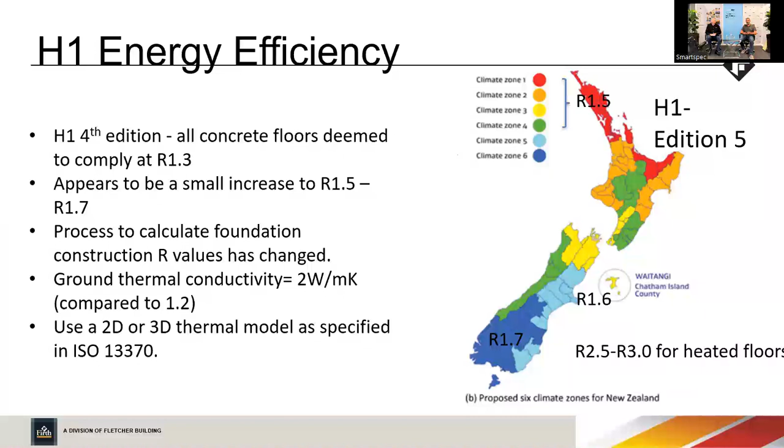The big change is the ground thermal conductivity. In the past, the ground was considered to be 1.2, having a greater insulation value. Now the ground's considered to be 2, meaning a lot more heat is lost from your foundation into the ground. That's the reason for the changes in any R values tabled from any manufacturer or supplier.

Here you can see this is from the Ribraft technical manual, showing how we tabled our R values previous to the 1st of May, and you can see the differences. If you look at area to perimeter ratio 2, for example, it's gone from 1.75 down to 1.13. That's a pretty big difference, not just a 0.2 or 0.4 difference, and this is what's causing the confusion.

So you need to consider that any manufacturer's tabled R values need to be checked to ensure they are correct as of the 1st of May.

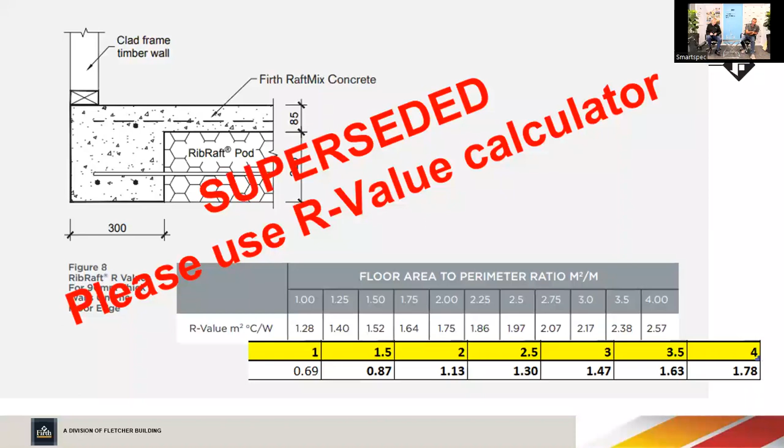In the front of the H1 AS1 document, the wording 'energy efficiency for all housing, and buildings up to 300 square meters' alone is causing some confusion. I did a presentation to the Auckland Council building inspectors recently, and they misunderstood this.

H1 AS1 includes all residential buildings. Some people are still questioning it, feeling that if it's a residential building greater than 300 square meters, it needs to be moved on to H1 AS2, and that's incorrect. The buildings up to 300 square meters clause is for commercial buildings, anything other than residential buildings.

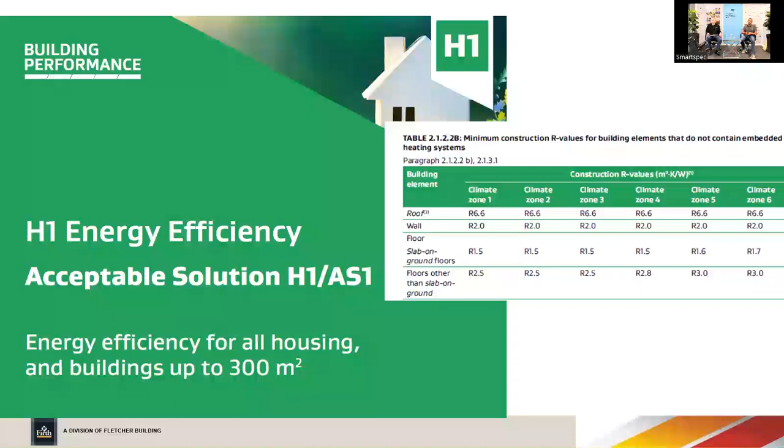I had a look through the questions that were submitted before the webinar, so I'm going to try to cover off some of those as we go. Extensions and alterations to foundations and buildings comes up pretty regularly.

What's important to consider is if it's a new foundation being built, that part needs to comply with the new minimum H1 clause, meaning if it's a small addition with a concrete floor, it needs to be fully insulated to comply with the new minimum requirements. If it's a renovation not affecting the floor, and the floor was built or consented pre-1st of May, then nothing needs to change on the floor.

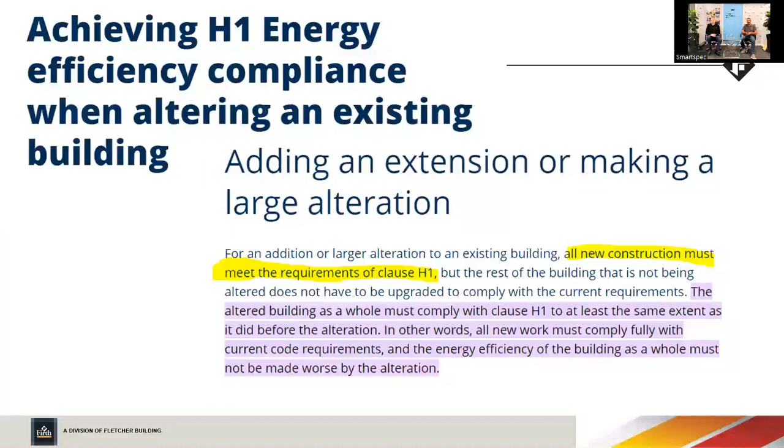It's the same as the rest of the building. If it met the H1 requirements at the time of consent and construction, then it doesn't need to meet the new H1. It's just the new construction that applies.

In the back of H1 AS1, there are tabled R values for area to perimeter ratios. This information can't be 100% relied on, in my opinion. For example, the hot edge for brick veneers, you can see the detail there.

We need that 25 mil concrete to transfer the brick veneer load back into the foundation, so we're not comfortable taking the hot edge directly underneath the brick veneer. If you look at the tables, it states an R1 edge insulation full height, so it's not possible to get it and comply with the B1 code.

This is why every material manufacturer or supplier actually needs to thermal model their own systems, and in my opinion, not rely on the information in H1 AS1.

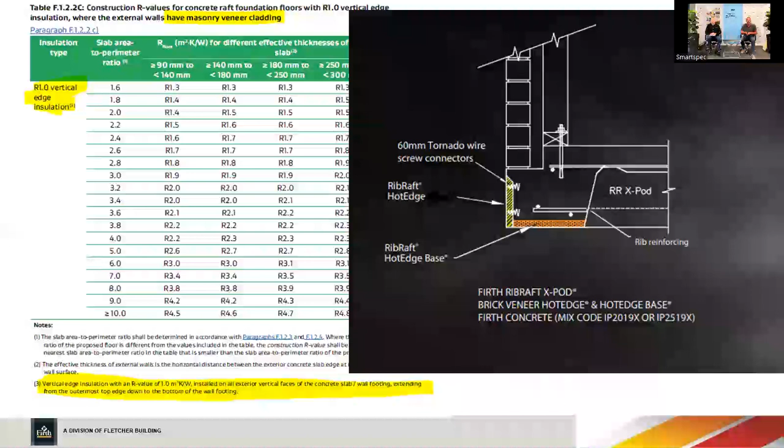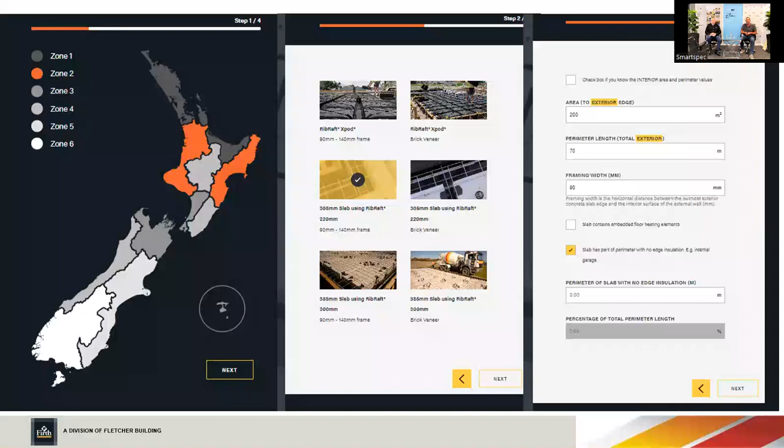So we thermal modeled all of our different systems. At the time, we were looking at different options to try and cover off every solution, for heated floors, non-heated, for X-pod, rib raft with a 220 mil pod and rib raft with a 300 mil pod. We tabled this information into a calculator. It's a very easy step, and I'm sure many of you are aware of it, so I won't go on about that, but it's a super simple tool and easy to use.

One of the questions that comes up is the insulation between conditioned and unconditioned spaces. The best way forward with this is to not insulate that area, to not try and have a thermal break built into the slab. So the solution would be to make a correction, where you just deduct your edge insulation, your length of perimeter with no edge insulation, off your overall result. This is the same as in the BRANZ House Insulation Guide, which has this correction table.

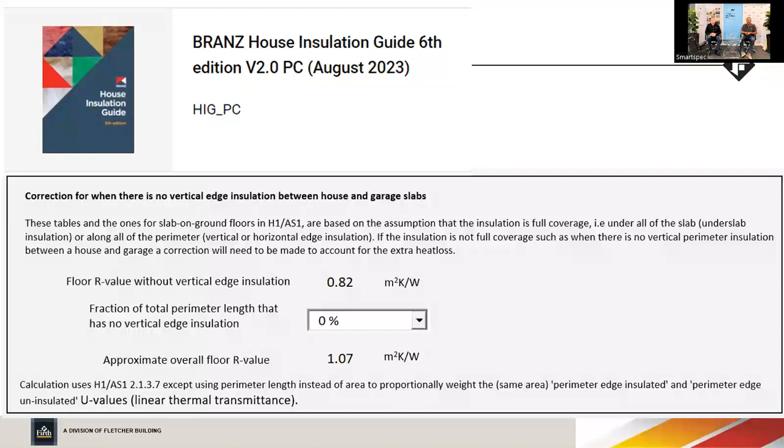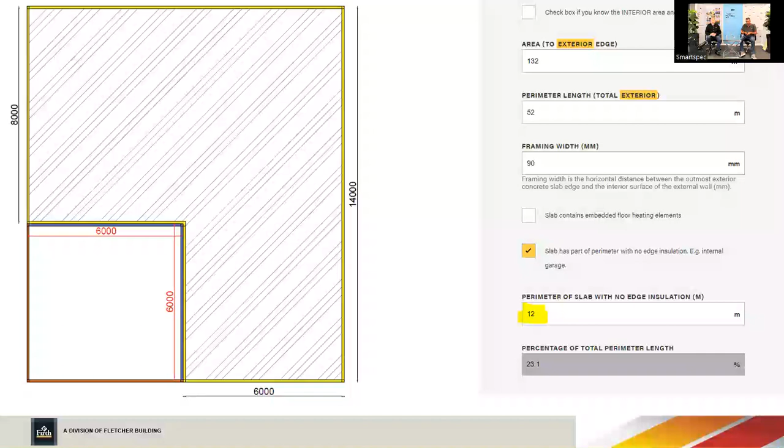So I'll show you how it works on the Firth R-value calculator, because this is coming up quite a lot. There's just your basic slab and garage area without the hatching, for example, so your area excludes the garage area. Your perimeter now becomes the full perimeter, but is an internal 6 meter and 6 meter, the 12 meter section - that's your new perimeter. So you can select the box where it has slab as part of perimeter with no edge insulation and enter your numbers, that's 12 meters, and the calculator does a correction on a percentage basis.

Just as an example, you'll see a detail pop up. This is the same floor slab as an example. Your area to perimeter ratio is 2.5, 23% without edge insulation. So if you use hot edge extra and a hot edge base in this scenario, you get an R value of basically 1.6.

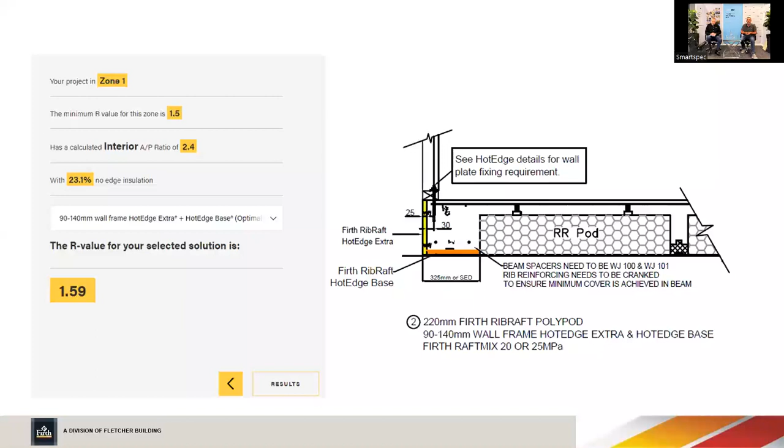Questions I'm being asked - people are not seeing the drop-down box, so purposely I'm showing the slide. At that stage in the calculator, you can drop down the box and see all the other insulation scenarios we assessed. The calculator will always find you an optimal result. You can go below minimum, see what - for example, this optimal was hot edge extra and hot edge base. You can go below and just use the hot edge extra and eliminate the base, or you can eliminate all edge insulation and see what your R value is. So the same example would give you an R value of 1.27 with no insulation. And this is the PDF that you could then submit for building consent if you're wanting to use the calculation method, where you don't meet the minimum and you're using a lower value for calculating.

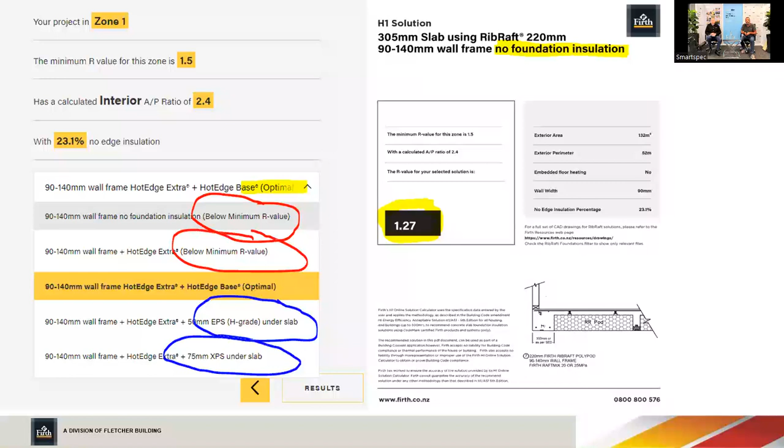This was a project I worked on with a designer. He had these 4 units and he was looking at what he needed to do to get to the new R values. Eliminating the garage space is what is required as it's non-habitable, non-conditioned space. The area to perimeter ratio is 2. Uninsulated standard rib raft system, R value is 1.1.

Now, in my opinion, if you can insulate that garage area, you're going to increase your area to perimeter ratio to 3.2 on the exact same job. That uninsulated R value is 1.5 and complies with the minimums in zones 1 to 4. That would also eliminate the need for insulation of the first story floor, so the underside of that floor in the garage space - possibly a cheaper option. And I know there's some work being done on garage doors, so if we could include that, that would be, in my opinion, a better result on this kind of style build.

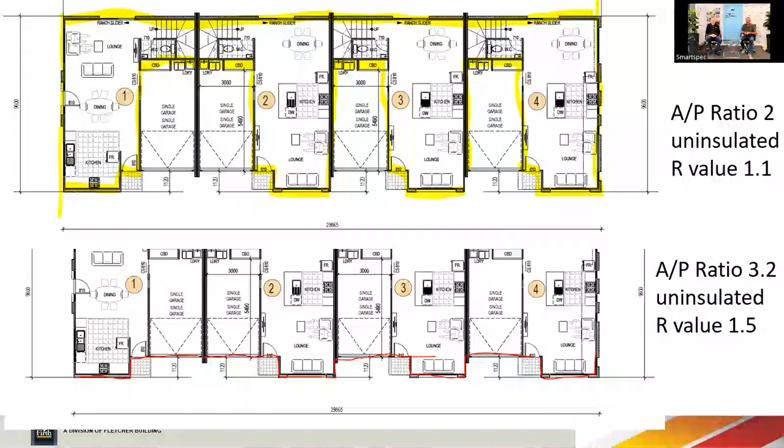The hot edge system has been around for about 7 or 8 years. Obviously, there was a lot of talk with edge installations coming from many years ago.

It is no doubt the most complete system on the market. We offer a free material take-off service. We've got a brick veneer option, framing options, and a corner bracket that makes the system neater and more durable. There's Dan Dam tape to prevent leakage when concrete's poured between the boxing and the hot edge, and tornado screws to anchor the board into the slab.

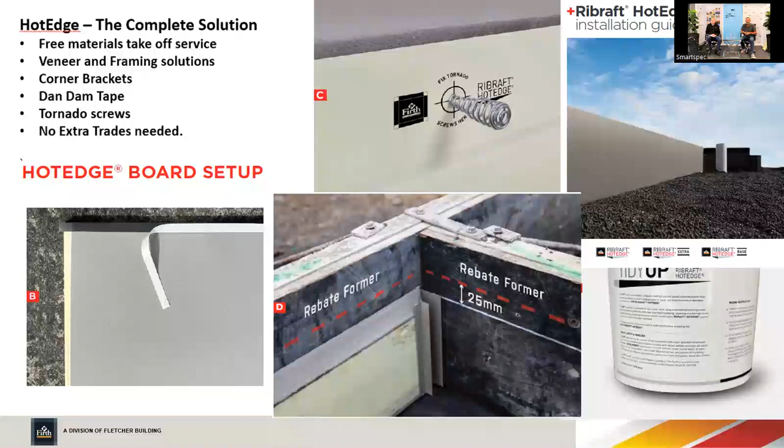Being a product that's installed in situ, it doesn't need an extra trade to come on site to apply, and also another extra trade to plaster. Anybody that knows, if you've tried to plaster something like that at ground level, it's not an easy process. We also sell it with a tidy up product, so you can patch small imperfections in the plaster.

Just a basic slide showing hot edge extra and a brick veneer on the right-hand side there. You can see the 25mm concrete that's needed. One question that came up was the brick veneer and the heat loss path. Even if you had edge insulation right up to the underside of the brick veneer, you'd still have a heat loss path because heat takes the path of least resistance—it goes through the concrete, which is dense, then through the brick veneer, which is also dense, and out. But the improvement that edge insulation offers is still fairly similar to a framing solution.

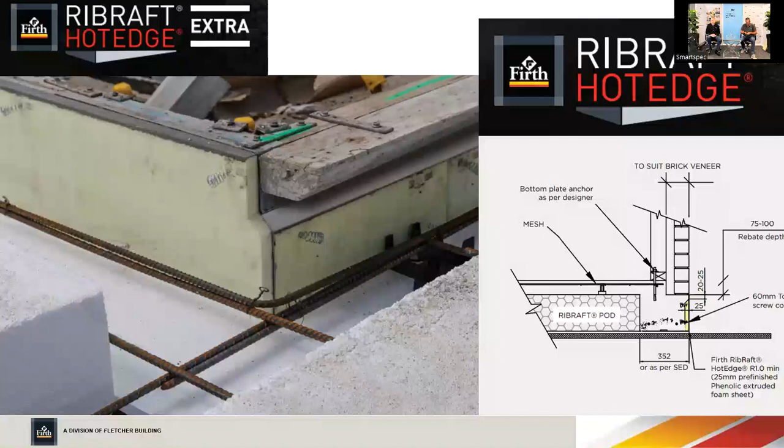Another question that's come up a lot: can I use underslab insulation without edge insulation? This is possible, and the calculator, even though it wasn't designed for this purpose, can be used in this instance. You'd do your area normal, your perimeter normal, your framing normal, then select the box where part of the perimeter has no edge insulation, and put in your full perimeter length—in this case, 85. Our percentage of total perimeter length will be at 100%.

At the end of the process, even though it still says hot edge extra on the solution, it's giving you an R value with no hot edge because you've eliminated the entire perimeter edge insulation. So the result is 1.8 on—I can't remember the AP ratio on this one. I've written it down, yeah, there—that's our AP ratio of 2.

Another question was, how do I prove this to the building consent officers? We supply a PDF at the end of the process with the calculator. In this instance, I'd recommend highlighting the fact that you've got no edge insulation and it's 100%, because the solution still says there's edge insulation. But that would be your correct construction R value with 50mm of EPS underslab and no edge insulation.

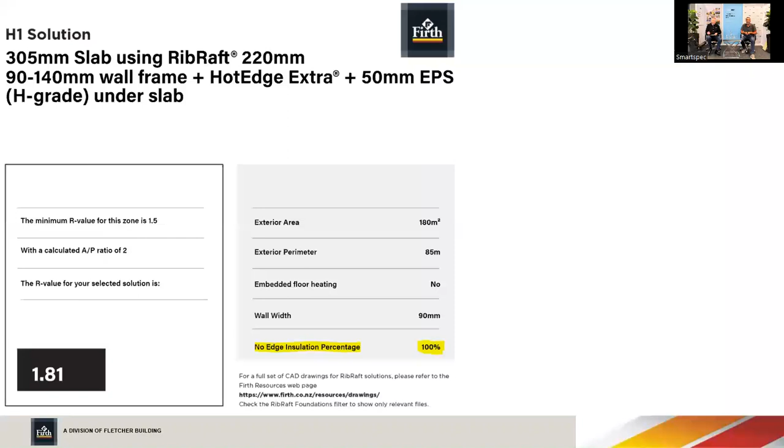The WANZ bar detail with hot edge—we're getting asked about this a fair bit. This detail is in the hot edge install manual, so we've tried to make it clear. You can't fix anything rigid through a non-rigid board to get a secure fixing. So at step downs or joinery details, you need to leave a 25mm gap from your WANZ bar fixing to the top of the hot edge.

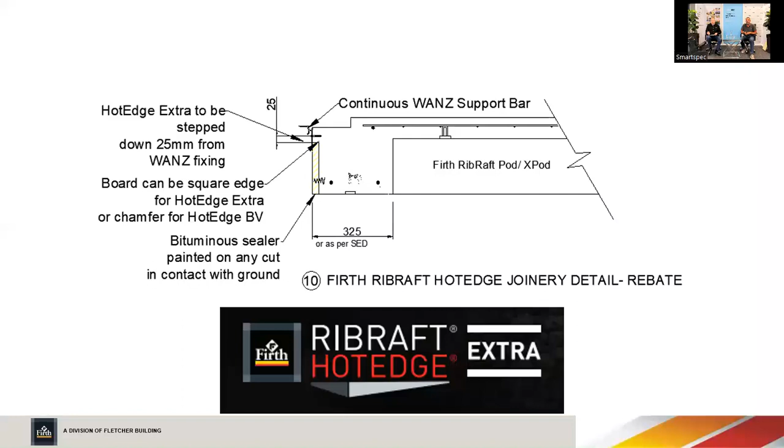Another one that's very topical is the wall plate anchors, a solution everyone's currently dealing with. Firth are front-footing this in a great way. We've done some BRANZ testing on a wall plate anchor at 11 degrees, and the results are really very good. Currently, we're insisting that if people want to use the system, they can use the data from the tests we've released, but we're saying the wall plate anchor needs specific design from an engineer.

This is based on the fact that we aren't there to monitor construction tolerances. If the frame overhangs more than specified, or the bolt didn't go in at 11 degrees, the building inspector is going to phone Firth. We're not there on site to monitor this, so it's better if an engineer can. It's a simple solution if something didn't go exactly to plan on site—it might just be a matter of installing bolts at closer centers.

What we're also currently working on is, with the wall plate anchor company, a jig that will ensure the bolts are drilled at 11 degrees, and also an anchor bracket, a wall bracket similar to a handy brace, that can cope with all the loads. We're going to BRANZ test these in November, probably the end of November, so hopefully we'll have our report out before Christmas, but can't be sure. Then that will hopefully be a system that just comes with a PS1, and we can continue to look forward with this.

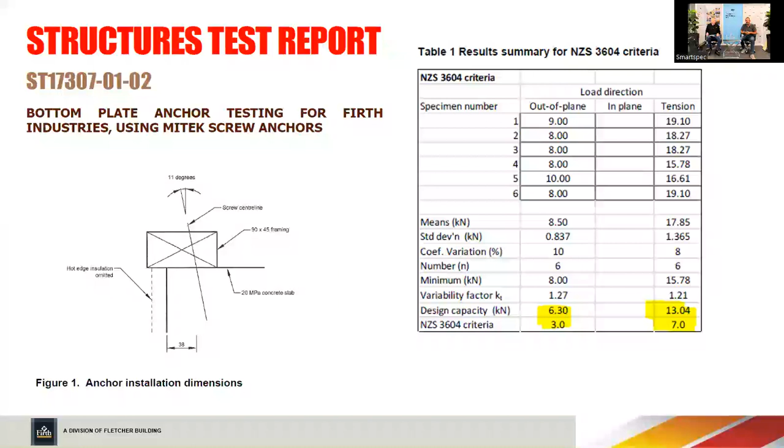140 framing solves a lot of issues with H1 for slabs and walls. I was made aware of a study that BRANZ did a few years ago. They took 47 houses and looked at the timber framing percentage in the walls. The average was 34%. The industry is still working on an average of between 14 and 18%, but they came up with 34%, meaning there's a lot more timber in a 90mm frame wall, more heat loss path through there, and less insulation that can actually be fitted in the gaps between the framing.

For example, if you took a material R value of 2.8, which is the maximum you can put into a 90mm frame wall, and your framing was 23%, the construction R value you can achieve is only R2. So it tells you that if your average is 34% and you're putting in your maximum insulation in the wall, are you actually achieving your minimum R2?

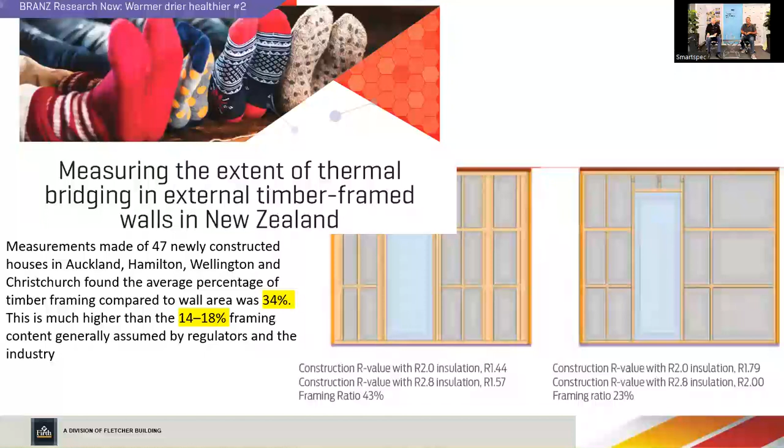Obviously going to a 140 frame can easily solve that. Bottom plate anchors become more simple, but we do understand there's issues with the amount of timber, so maybe there's reluctance to move to 140 framing.

The BRANZ House Insulation Guide 6th edition again highlights the same thing. On the right hand side, in yellow at the bottom, is your material R value 2.8, and it shows you at 23% framing the number on the right. Same thing, it's R2 at 23%, and as soon as it's 25% or more, it's not achieving the R values.

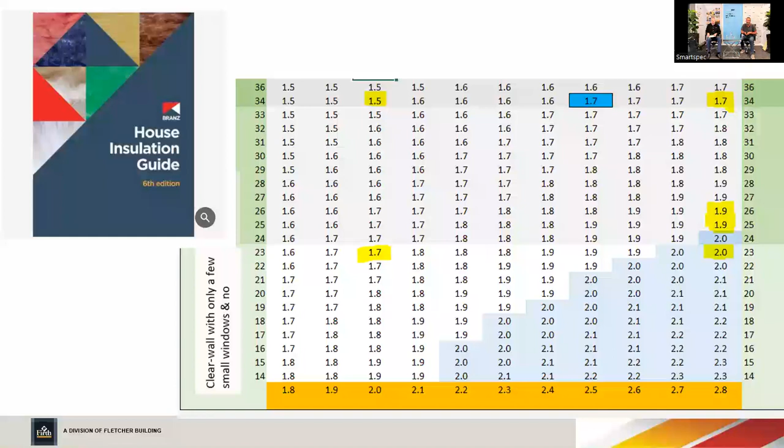If you use Design Navigator, it's still based on an average of between 14 and 18%, and you can go down with your material R values to a 2.5 or 2.2 and still achieve minimum R values.

Another thing we've been working on is if we could move the insulation inside of the floor. Firth did a lot of work on this prior to going to thermal modeling. We looked at aerated concrete below slabs, and even reducing the thermal conductivity of the concrete, if we could get that right, to see what benefits we could achieve. One we're looking at currently is internal insulation.

This, at just 30mm thick, as an internal cork-based screed, can achieve a 0.6 on the floor. That's quite a decent improvement and can get you across the line in most instances. Also, at the end of life, this would be completely recycled, meaning you wouldn't have anything going to dump.

It's a shame we're looking at insulation and we're looking at polystyrene again, when a lot of the drive is towards plastic pod systems and trying to eliminate polystyrene. So it's not like we've stopped looking, it's just that EPS is available for current solutions, but we'll keep looking for more greener solutions in the future.

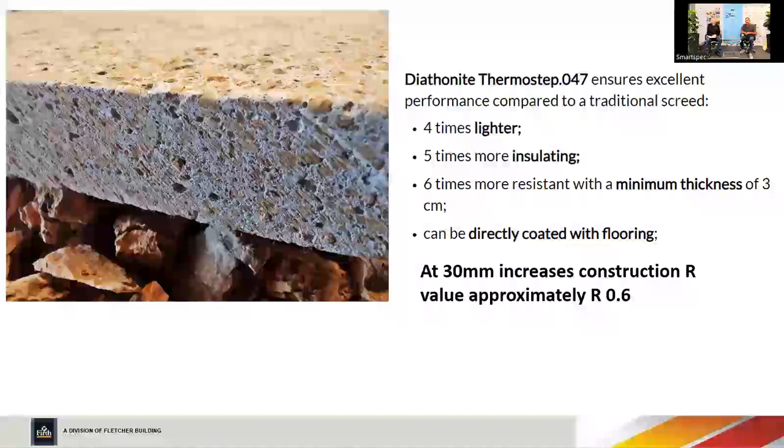Something that's also been causing some confusion: the Firth code mark system never did include hot edge or underslab insulation. We're currently going through the process of revising the code mark. We put up a note on our website saying that the code mark was invalid, I guess. We've made that more clear now. We reworded this - the RibRaft CodeMark can still be used as long as there's no additional insulation, so it's a standard RibRaft buildup.

There's no reason why you can't use it. The only thing that isn't current is on the certificate would be the H1 code. But if you show compliance through a Firth calculator, for example, and you can see your R value that way, then there's no reason why you can't use the code mark as is, as long as there's no additional insulation - so no underslab and no edge insulation.

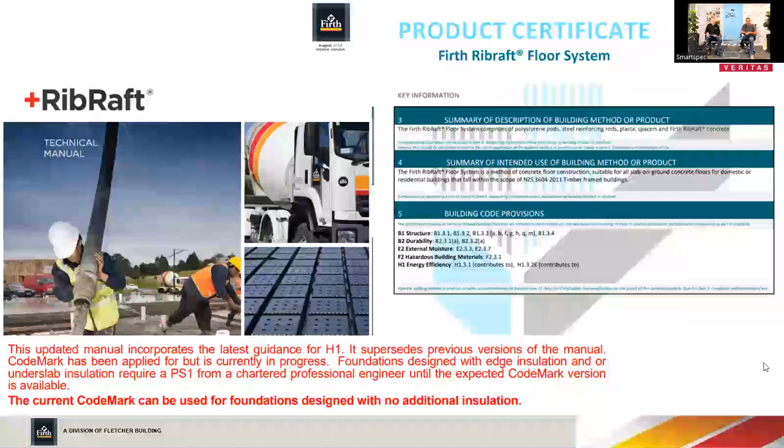And that's everything I've got covered in the presentation.